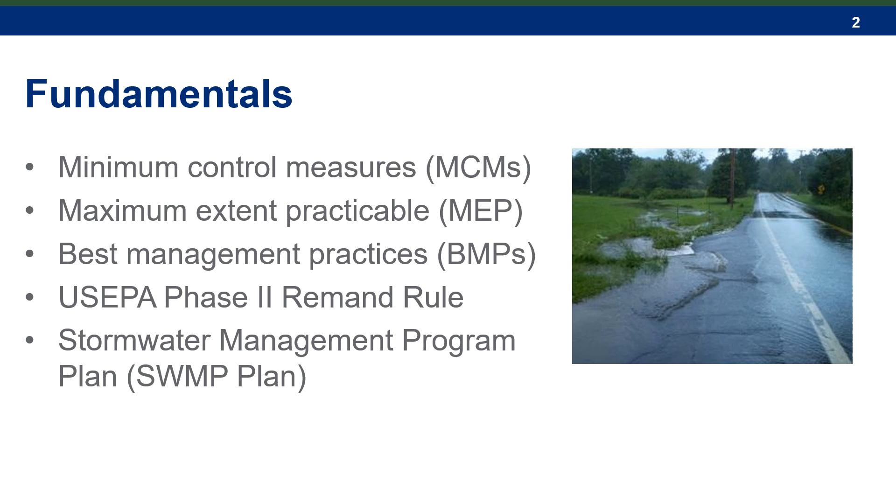The items listed on the next two slides can be found in the Compliance Items Summary tool, which is located on the New York State DEC's MS4 Toolbox webpage. For this slide, I'm going to go over a selection of items that are due within 1 year. The items that are identified as due within 1 year can be found on the Deliverables tab of the Compliance Items Summary tool. These deliverables are a bit separate than items I'll go over in a second because since they are a deliverable, once those tasks are complete, they no longer have to be done. You can kind of check them off your list.

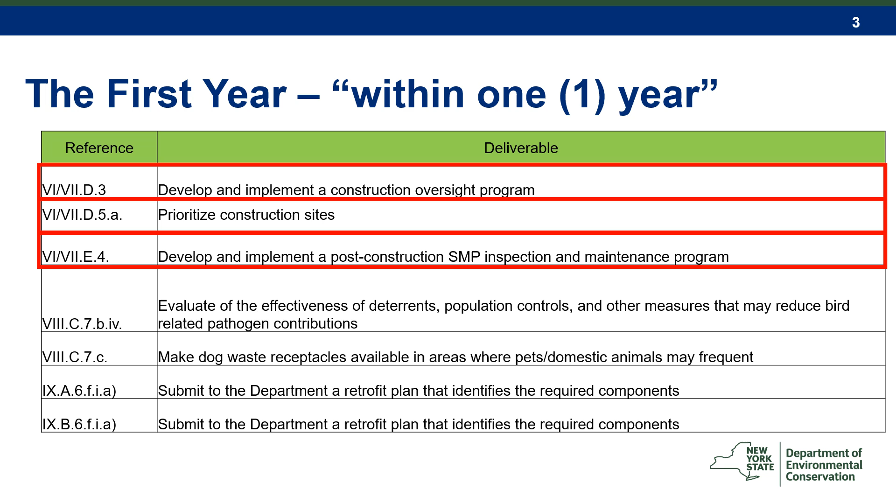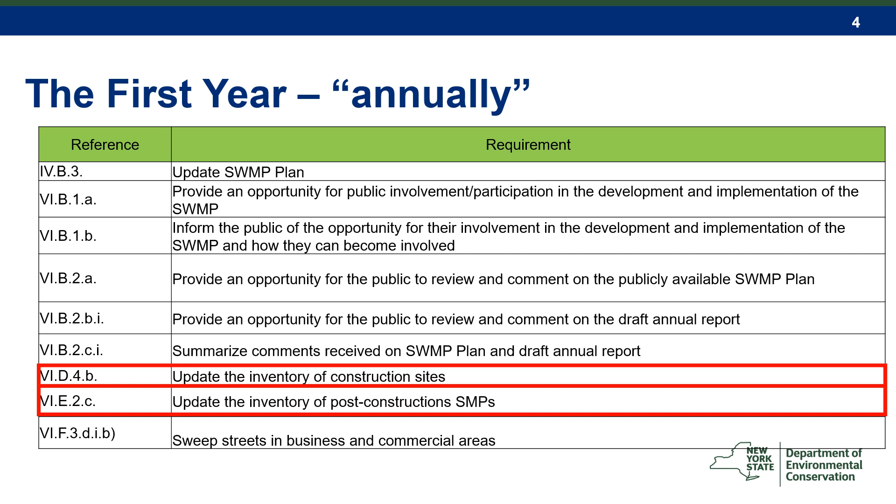For today, we are going to be going over developing and implementing a construction oversight program, prioritizing construction sites, and developing and implementing a post-construction stormwater management practice inspection and maintenance program. The items listed in this table are due at a frequency of annually. These items can be found in our Compliance Items Summary tool on the Recurring tab. For today, again, we will be going over a selection of these items. We will be reviewing an update to the inventory of construction sites, an update to the inventory of post-construction stormwater management practices, and the requirement to sweep streets in business and commercial areas.

The first part that we're going to go over today has to do with minimum control measure 4, construction site stormwater runoff control. And again, we will be reviewing those items that are due either within 1 year or annually. The items that we are going to review today for minimum control measure 4 include the construction oversight program, an update to the construction site inventory, and prioritization of construction sites.

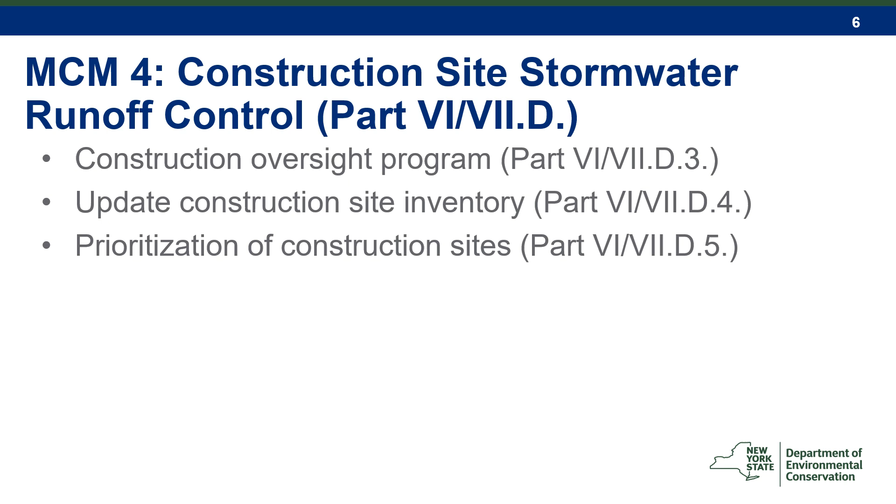The construction oversight program matches the strategy set forth for all the other programs set in the permit. And that looks like development of procedures for your program, providing training on those procedures for your program, writing down who took the training for that program, and then updating your procedures as needed. Components of a program can be found on page 21 of the fact sheet.

For the construction oversight program, the procedures must include applicable construction sites, what types of construction activity require a SWPPP, the procedures for submission of SWPPPs, SWPPP review requirements, pre-construction oversight requirements, construction site inspection requirements, construction site closeout requirements, enforcement process expectations for compliance, and other procedures.

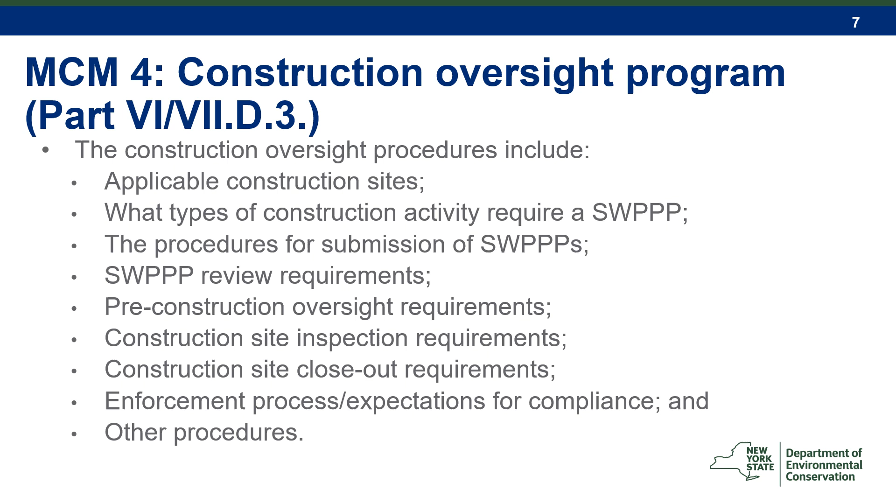I do get the question sometimes about what are the other procedures I include. You can include anything with regards to your program here that helps you get your program implemented. Maybe it's just where to locate the truck that you're going to use to complete your inspections, but it could also include things like some municipalities which have smaller thresholds for land disturbance where they go do inspections, or the frequency in inspection could be higher than what is required by the MS4 general permit.

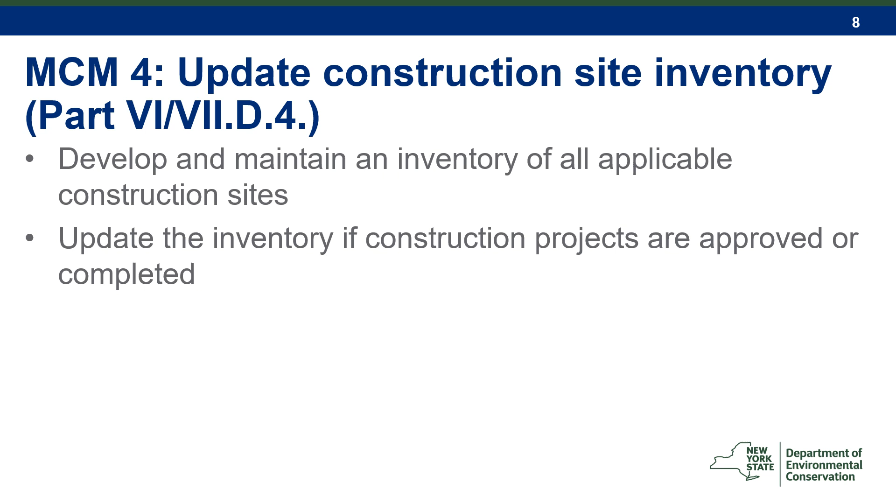The next part we are going to review is minimum control measure 4, an update to the construction site inventory. The requirement to develop and maintain an inventory of all applicable construction sites was a 6-month requirement, and that was asked about on the interim progress certification. The requirement to update the inventory if a construction project is approved or completed is an annual requirement. Similar to other annual requirements, this is a requirement to make sure that things are kept up to date. However, the permit needs to be clear, specific, and measurable in line with the Phase 2 remand rule. So that is why the annual compliance timeframe was included.

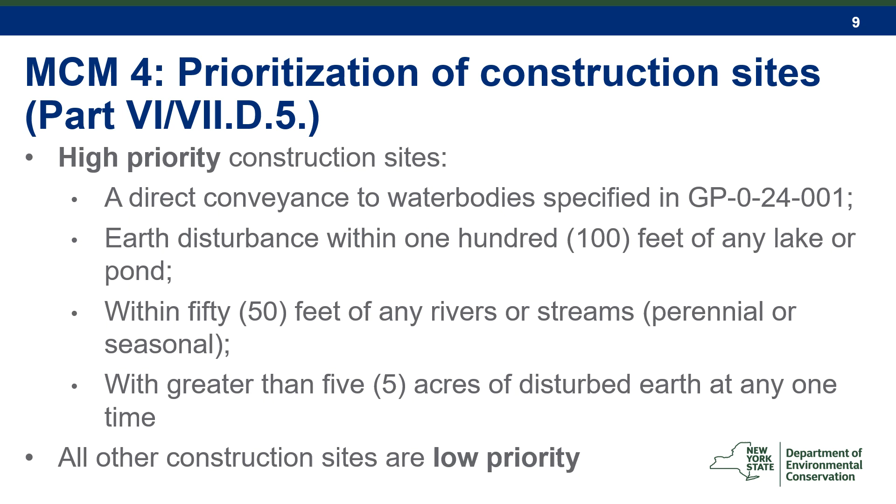The last part of minimum control measure 4 that we're going to go over today is the prioritization of construction sites. High priority construction sites are those with a direct conveyance to water bodies specified in GP 24, that have an earth disturbance within 100 feet of any lake or pond, that are within 50 feet of any rivers or streams, or that have greater than 5 acres of disturbed earth at any one time. All other construction sites are low priority.

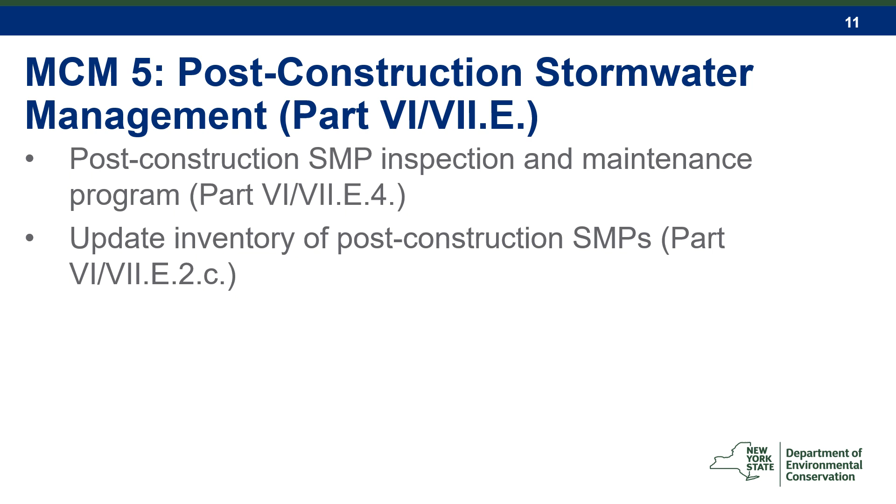The next topic that we will discuss is MCM5, Post-Construction Stormwater Management. The goal of MCM5 is to ensure the proper functioning of post-construction SMPs so stormwater pollution is managed effectively. The two subjects of MCM5, Post-Construction Stormwater Management, that will be reviewed are the Post-Construction SMP Inspection and Maintenance Program and updating the inventory of post-construction SMPs.

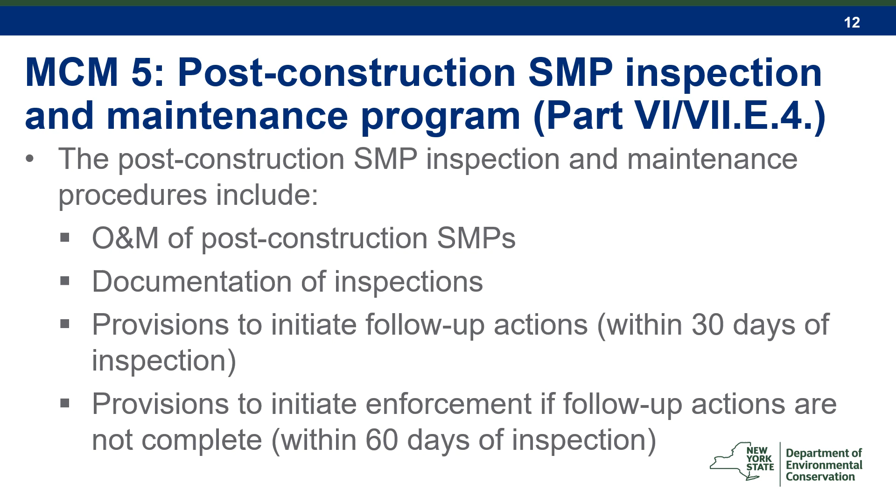The post-construction SMP inspection and maintenance procedures include O&M of post-construction SMPs, documentation of inspections, provisions to initiate follow-up actions within 30 days of inspection, and provisions to initiate enforcement if follow-up actions are not complete within 60 days of inspection. The components of the program can be found on page 21 of the fact sheet.

A common question that we are asked is if a post-construction SMP is installed in the absence of a construction activity, does that post-construction SMP need to be included in the inventory? The answer is, according to 40 CFR 122.34(b)(5)(i), the permit must identify the minimum elements and require the development, implementation, and enforcement of a program to address stormwater runoff from new development and redevelopment projects that disturb greater than or equal to 1 acre, including projects less than 1 acre that are part of a larger common plan of development or sale that discharge into the small MS4.

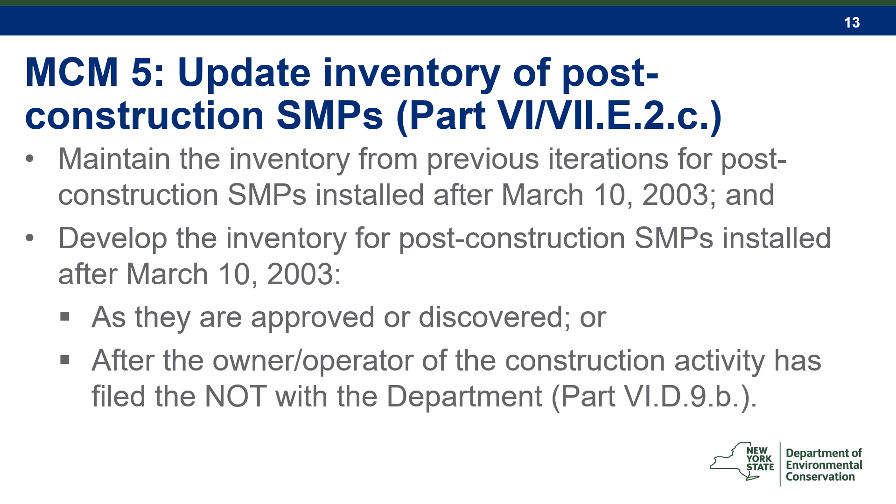So the post-construction SMPs must be 1, installed as part of construction activities that result in land disturbances of greater than or equal to 1 acre, and 2, directly via pipe or overflow structure discharged to the MS4. Although not a permit requirement, the MS4 operator may decide to include all post-construction SMPs in the inventory, so they have a comprehensive list. For example, if your municipality has a rain garden installation program that occurs outside of the construction activity, you may decide to include that on your inventory, even though it is not required by the MS4 general permit.

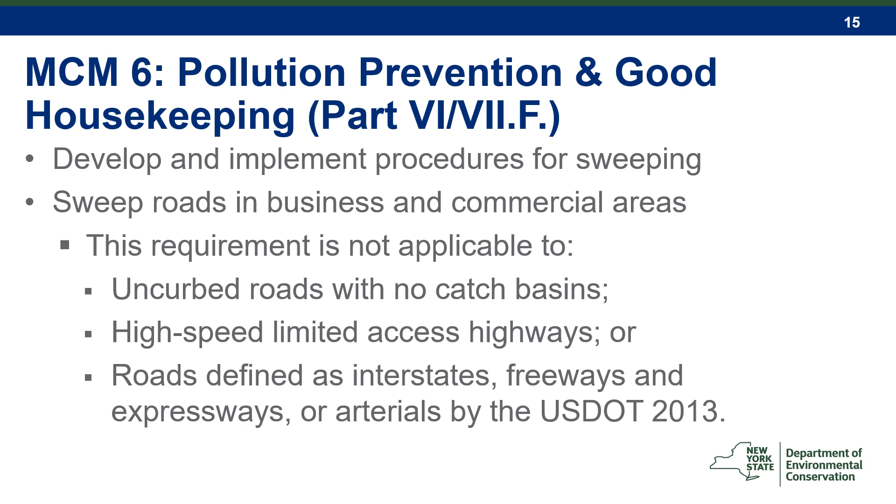As a reminder of why we made this presentation, it's because of the reports that are due under the MS4 General Permit GP24. The annual report, the first one for this permit iteration, will be coming due to the DEC in April of 2025. That report will cover a reporting period of January 3rd, 2024 to January 2nd of 2025. In the same way, we have interim progress certifications. The reporting periods for the interim progress certifications are as follows: from January 3rd through June 30th, and that would need to be submitted to the New York State DEC by October 1st of each year, just as one was recently submitted. And then also July 1st through January 2nd, with a submission date of April 1st of each year to the DEC.

You might notice that there's an annual report and an interim progress certification, both due on April 1st of this coming year. Instead of filling out two separate forms, the information required by both of these reports will be combined into one form. So each entity will only need to submit one form to the New York State DEC, again, by April 1st.

I like to wrap up these presentations with a quick overview, again, of the tools that are available. Largely, I like to point people to the MS4 permit webpage. That contains our permit, fact sheet, and responsiveness summary. There's a lot of information in there, and it can be really helpful with understanding and implementing the permit requirements. The MS4 toolbox page has our stormwater management program plan components tool, as well as the compliance item summary tool. Michelle and I are working on an updated compliance item summary tool, and I'll let you know when that becomes available. As always, the permit is the ruling document. So if there's any inconsistency with the tools, defer to the permit. The permit always will be the ruling document.